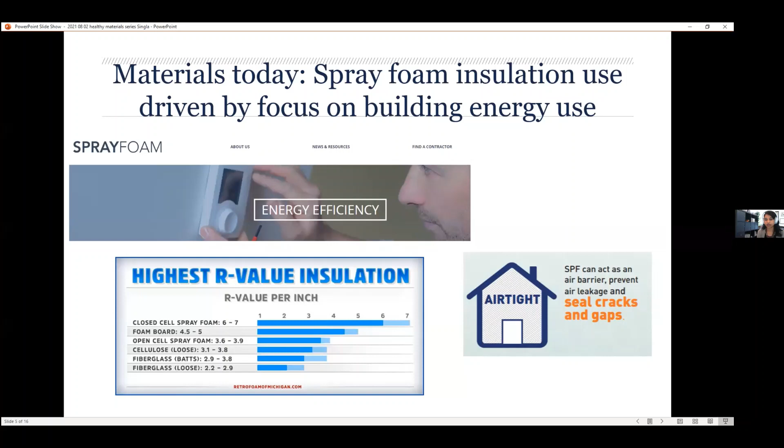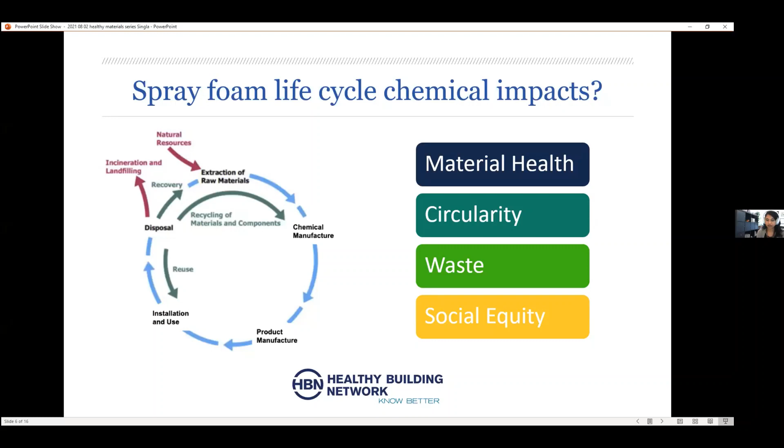So to do that, in collaboration with the Healthy Building Network, I think Brian mentioned you already heard from Bill Walsh earlier in this series, working together with them to really understand the life cycle chemical impacts in the US of a key spray foam ingredient. And thinking about that potential impact at the different life cycle stages shown here, from chemical manufacture through use all the way to disposal, and looking at those impacts through the lens of concepts that you've discussed in the series that are in that materials primer, considering materials more holistically, thinking about material health, circularity, waste, and social equity. So here's a quick preview of what we've found so far.

So the key ingredient in spray polyurethane foam is called MDI, and it's a type of isocyanate chemical that is itself toxic. It's a respiratory sensitizer chemical. And we found that the chemicals used to manufacture MDI come from fossil fuels, and that these manufacturing and process chemicals are also hazardous. They can cause asthma, cancer, or immediate injury on contact. And the picture here shows one of the facilities that manufactures MDI in Baytown, Texas.

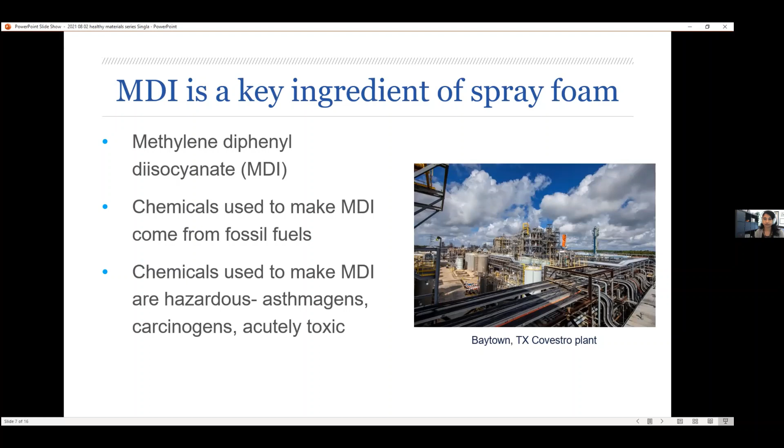So we found that in the US, overall, there's 3 facilities that manufacture MDI. They're all located on the Gulf Coast of Texas and Louisiana, shown in the purple icons on the map there. And together, these facilities release on average 560,000 pounds of hazardous chemicals into the air and water of these communities every year.

The facilities have a history of EPA non-compliance, and multiple accidents have been reported that injured workers or resulted in releases so toxic that surrounding communities were ordered to shelter in place. And these communities are disproportionately people of color. So in Louisiana, the percent Black population in the 3-mile radius around that facility is 2 to 3 times higher than the national average. And around the Texas facilities, the Latinx population, again, is about 2 to 3 times higher than the national average.

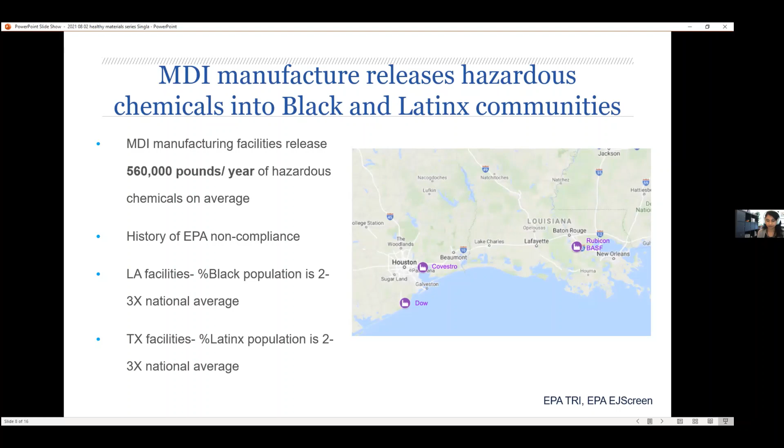And then looking at that end of life cycle stage, what we found is that spray foam is largely landfilled, and in that process can release microplastics and hazardous chemicals. And we didn't identify any reuse, recovery, or recycling pathways for spray foam. And this seems to be partly because it's challenging when the material is foamed in place and adheres to the surrounding building materials.

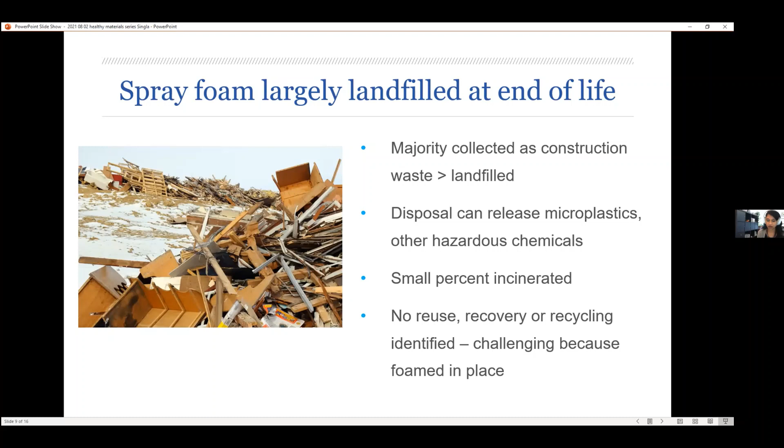So in summary, our case study found that spray foam performed pretty poorly in these important areas. It contains toxic components. There's no pathways identified for recovery, reuse, or recycling.

We're seeing large amounts of hazardous waste generated in the manufacturing process. And this is disproportionately impacting Black and Latinx communities in proximity to these facilities. So this really illustrates the negative, broader impacts that can happen when you're only focused on one aspect of a problem, like building energy use.

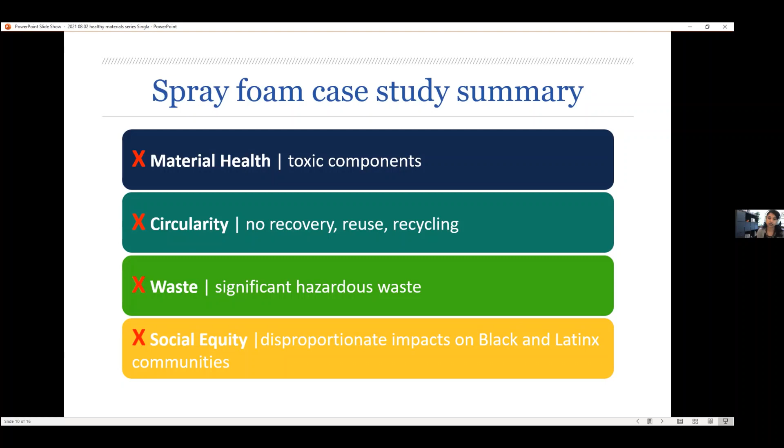So where do we go from here? And as someone who thinks a lot about policy and how policy can really help to support and drive the changes that we want to see, I wanted to share about some exciting new frameworks that are really taking different approaches to these intersecting issues of buildings, climate, chemicals, equity, these issues that kind of sit at the center of that spray foam case study example.

So these have all come out in the last year or two. It's really the latest thinking. And I'll talk briefly about each of them. So we have the health and well-being framework from the World Green Building Council, the chemicals strategy for sustainability from the European Union, and the equitable and just national climate platform.

So the World Green Building Council released last year these principles for a healthy, sustainable built environment. And if you're not familiar with the World Green Building Council, it's an international organization that's part of the UN Global Compact, and its members are all green building councils from around the world. So for example, the US Green Building Council is a member of the World Green Building Council.

And their mission is to advance the UN Sustainable Development Goals and positively advance climate action, health and well-being, use of resources, and a circular economy. So this framework has 6 principles for a healthy and sustainable built environment. And some of the examples from the different sectors they cover: in the protect health category, they're thinking about air and water quality, mental health, and community health. In the take climate action bucket, they're thinking broadly about adaptation, efficiency, and material health.

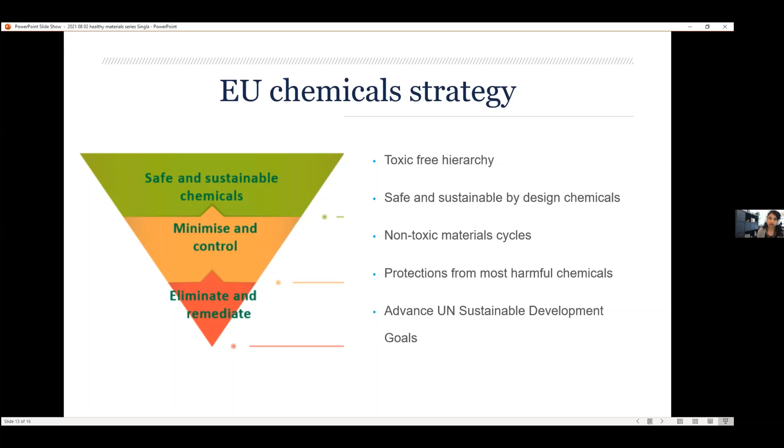And I wanted to point out one really important theme that really runs through and connects a lot of these areas. And that's these buildings, systems, and economies that work for people and all people. So really thinking about local and regional supply chains and inclusive access to high quality, safe, and family sustaining jobs.

So each of these policy frameworks is kind of coming from a different perspective, right? Focused on buildings, focused on chemicals, focused on climate equity, but there's some really important common themes between them, which I think are all major departures from how policies are constructed today. So I'd say first, today's policies tend to be pretty reductionist and address only a narrow aspect of an issue like building energy use. Whereas these policies are much more holistic and explicitly recognize the need to address interconnected systems and transform systems for change.

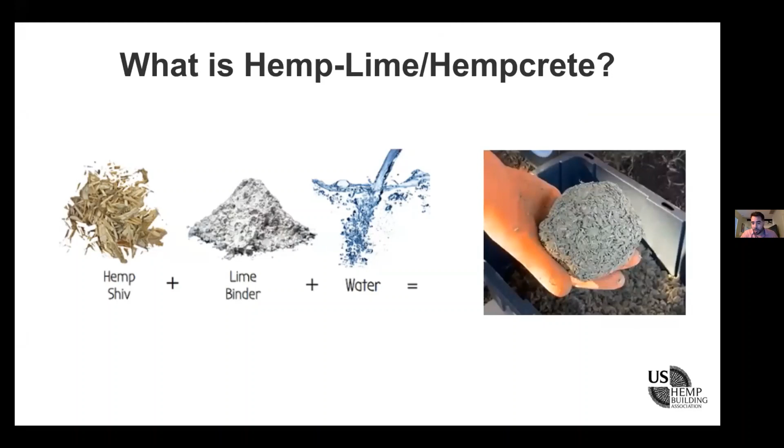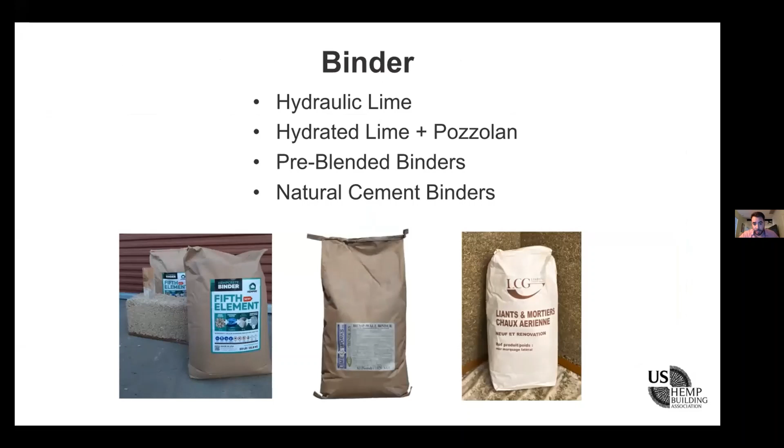concrete-ish insulation replacement. So what's so great about industrial hemp is that it's one of the fastest growing plants out there. And you take the hemp stalk and you remove the fibers, and what you're left with is the woody core, which is what you use for your infill mix. And there's different types of binders that you can use: hydraulic lime, hydrated lime with a pozzolan, pre-blended binders, and natural cements. And some of the benefits of hempcrete or hemp lime is that it's carbon sequestering. It has excellent moisture and thermal capabilities, fire, mold, and rot resistance.

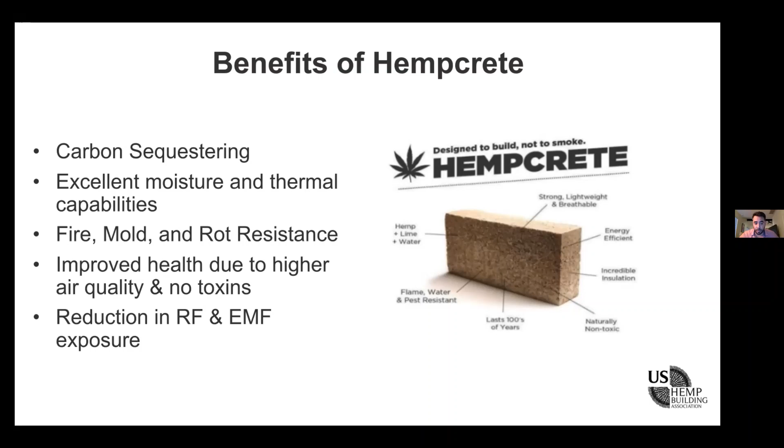There was an ASTM fire spread test done that came back with a 0 score, which was one of the first done here in the United States. It also helps improve health by improving the air quality and is 0 VOCs. And then people are starting to look into more of its RF and EMF reduction capabilities as well.

There's 4 main ways to install hempcrete. One is the cast in place in the upper left-hand corner, kind of like a rammed earth. You use the form boards to build up the insulation wall where you surround your studs. The second to the right of that is hempcrete blocks already pre-manufactured. All you need to do is mortar them together and you're good to go.

The bottom left is pre-panelized wall systems to help expedite the process and control the curing of the hempcrete. And then on the bottom right is the spray-applied hempcrete. So this is much faster, along with the blocks, which helps cut down the installation time and the labor costs, which cast in place in the upper left-hand corner could get a little bit more costly with.

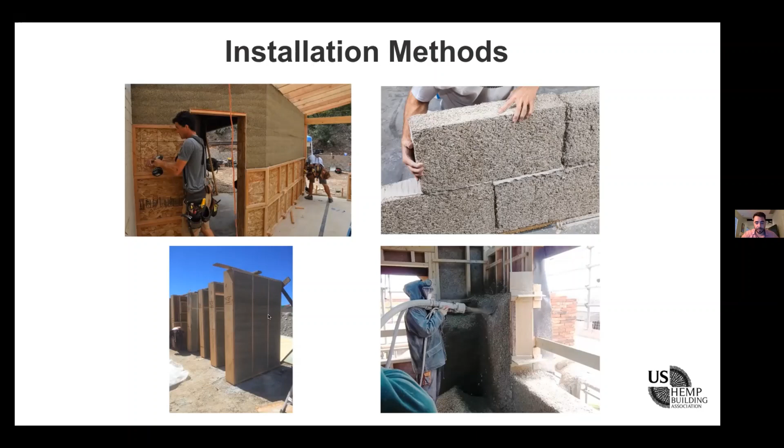So there are other hemp-based building materials. Hemp fiber insulation, hemp wool, is one. It's an easy plug-and-play material instead of hempcrete. A lot of the hempcrete installation takes some training and a little bit more advanced contractor knowledge.

There's hemp wood in the bottom left-hand corner, an amazing material replacing wood floors for more sustainable options for flooring, like bamboo. Hemp Shield, which is a non-toxic wood sealant based on hemp oil. And then Cannagrove is a company that has hemp-based wood fiber alternatives for cabinetry and other types of wood forms.

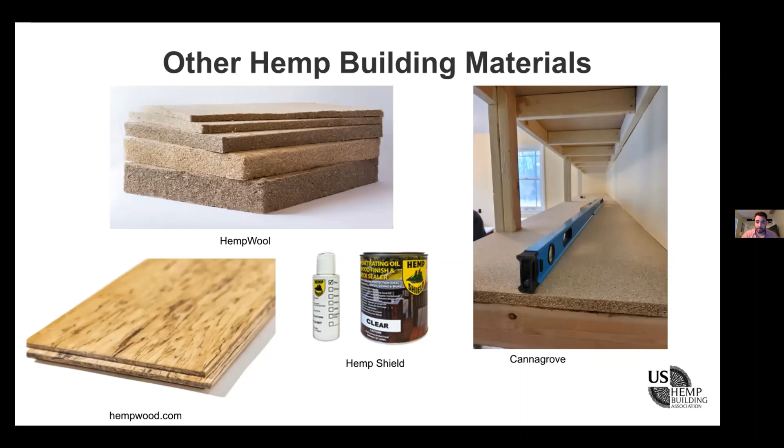Also, hemp-based plastics. There's a company, Hemp Plastic Company, that's doing an incredible job replacing a lot of petroleum-based plastics with natural hemp plastics. So lots of plastics are used in the construction and building industry as well. So if we can start to implement more of these, non-toxic, biodegradable options would be great, especially for the workers on site, and where it inevitably ends up in our soil.

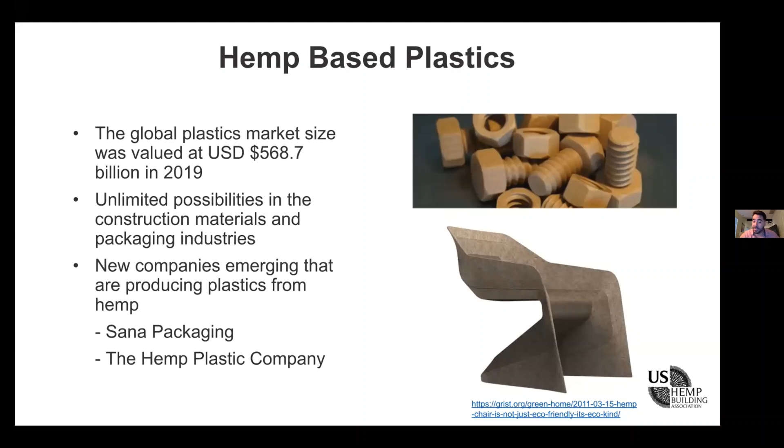So some of the current limitations that we have in the hemp building industry, and especially in the industrial hemp industry, is the availability of local materials. A lot of these materials are sourced from Canada and Europe, and a lot of the issue is we don't have a lot of farmers growing the industrial hemp crop. Mostly it's grown for CBD. And also we don't have a lot of the processing capabilities yet.

So there are companies, IND Hemp out of Montana. There's a facility coming up here in Texas that are really trying to encourage and focus on the industrial side of hemp and getting those processed materials, especially for the construction and building industry, to help support this demand.

When it comes to hempcrete as well, quality control, making sure that the labor is skilled and knowledgeable. There are some different intricacies when you're using hempcrete to take into account. Educating experienced architects, engineers, and contractors, and starting to get hempcrete and hemp-based building materials acknowledged in the local building codes as well.

And if you're looking to use hempcrete, upfront construction costs can be up to 10 to 30% higher than traditional stick frame construction due to the current limitations above. But once we can start to find faster ways to implement the insulation and have more efficient ways of educating our contractors, that cost can be reduced. And also with the localization of processing and industrial hemp growth here in the United States.

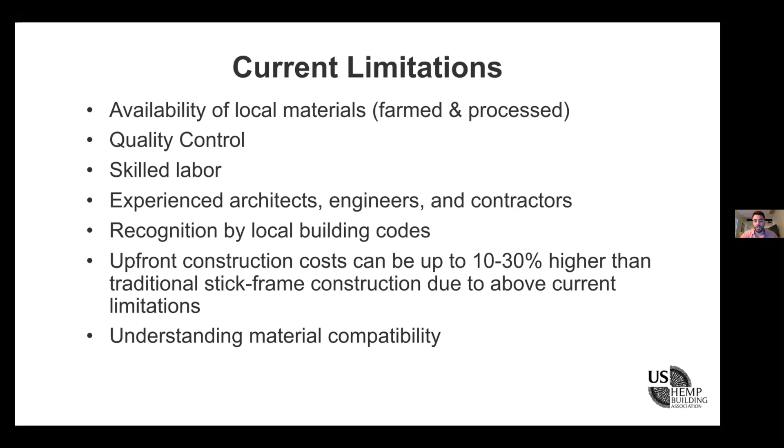And then also understanding other material compatibility when it comes to hempcrete. When you're using hemp fiber insulation like hemp wool, that material compatibility isn't as important. For hempcrete, you want to make sure that you do have vapor permeability.

So I'm sure as many of you know, especially being a part of this group, the most important thing that we're really trying to reduce here is our carbon footprint. A lot of the industries and most people you talk to out there are really just focused on operational energy, whereas we're really looking to focus on the embodied energy of the materials that we're using.

So one of the great things, I apologize. One of the great things that hemp is able to bring is a localized material that is very highly carbon sequestering. Also, when it comes to the lime binders that I was speaking of previously, you can localize that, looking for localized pozzolans and localized hydrated lime to really localize the supply chain and regionalize that.

So it's very important, and the U.S. hemp building industry really is focusing on reducing the embodied carbon as much as we can by trying to support the different regions when it comes to localizing industrial hemp farming and helping get processing facilities in those different regions as well.

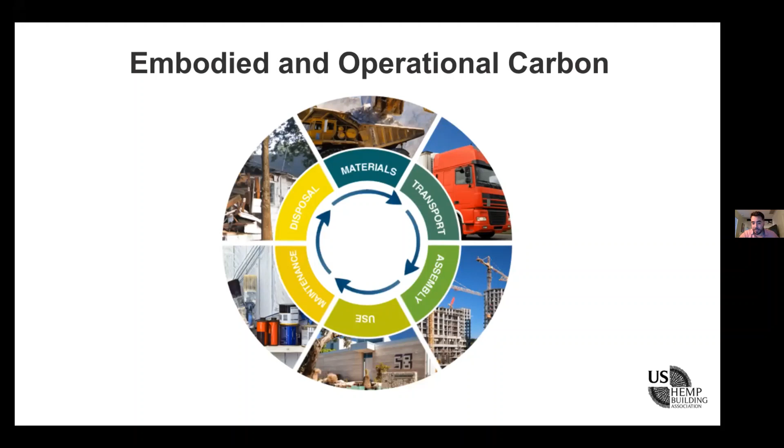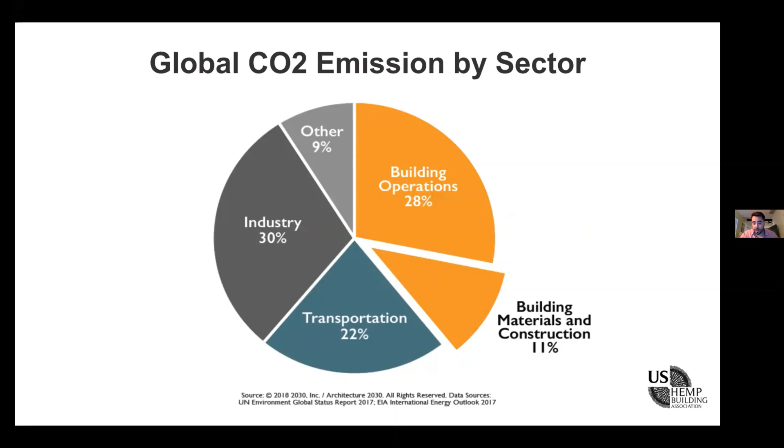So the global CO2 emissions account for almost 40% with the building operations and building materials and construction. So we really feel that the industrial hemp building industry can help reduce that. And in one of my favorite books, The New Carbon Architecture by Bruce King, he actually did a carbon sequestering insulation study with hempcrete and found that the CO2 sequestered from a 4x8 foot wall at an R28 insulation value was the most carbon sequestering, just above straw bale.

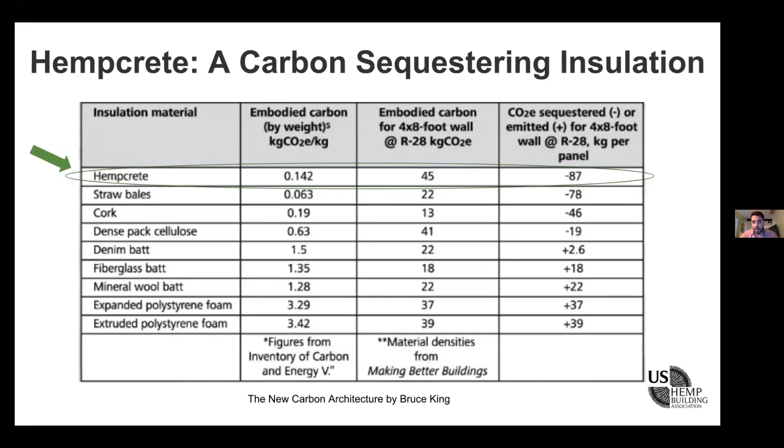So if we can really educate our building industries to start to use these types of materials and alternatives, one, we're making a healthier built environment, but also helping with the solution of reducing our carbon footprint.

And a lot of people ask, especially with hempcrete, what is the carbon sequestering nature and the percentage that comes out of it? So most of the carbon sequestered during the process is through the cultivation of the industrial hemp. The rest, that 10% or so, is the calcification when the hemp is mixed with the natural cement or hydrated lime, and the wall insulation system begins to harden. So that's the percentage breakdown of the CO2 sequestration.

So I'd like to encourage people. Before, I used to always be pulling examples of hempcrete structures in Europe or in Australia. But as I'll show you here in a little bit, there's actually a lot of great projects coming up. Up here in the top left-hand corner is an affordable housing project in the UK called the Triangle Housing Project in Swindon, one of the first affordable housing projects built with hempcrete. To the right is a beautiful condominium project that they did in Italy.

And then they used hempcrete for the construction of a Marks and Spencer department store, where they found almost a 40% reduction in their operational energy use. So getting commercial projects has already happened in Europe. Unfortunately, we haven't gotten there yet in the States. I'm hoping in the near future that'll begin to be the case.

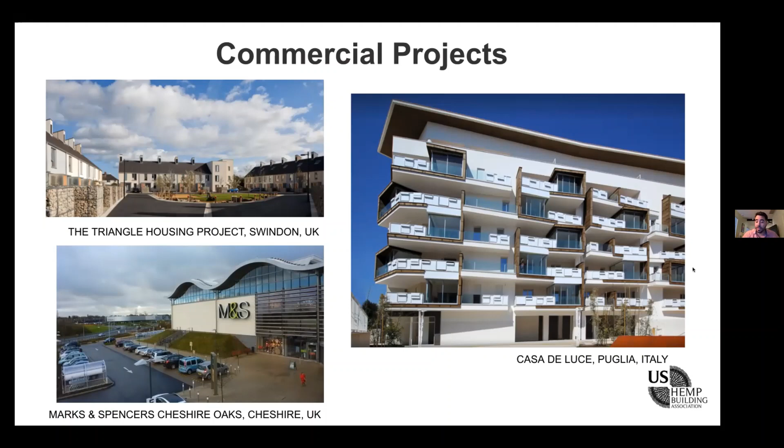But the US is starting to compile quite a few projects, which is great for local building code education, getting builders and contractors more comfortable and excited to use these materials. Up in the top left-hand corner is the Highland Hemp House out in Bellingham, Washington. The hempcrete was installed by Hempitecture, as well as one that they did down here in Leander, Texas, which is right outside of Austin.

This one was more of a custom home build that used a Minka frame from Japan, a very unique project. I wouldn't say it's the nicest carbon footprint on that project, but very unique and beautiful architecture. One of the first hempcrete homes that was built in the US was in Asheville, North Carolina. That was actually built for the mayor, and it really set the tone for the industry.

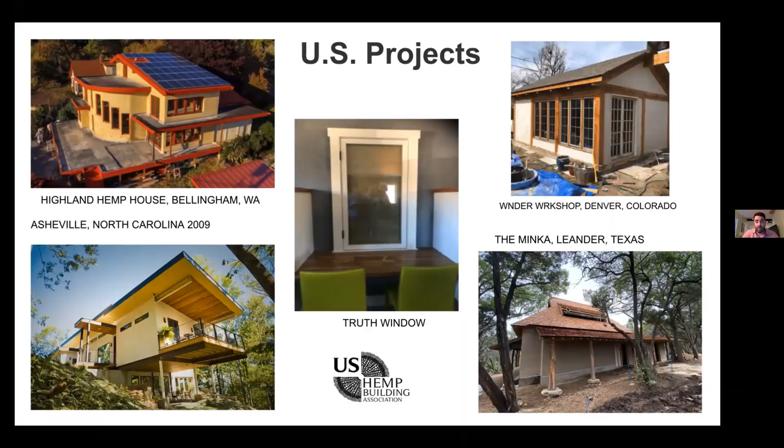The first permitted hempcrete home out in Denver, Colorado, the Wonder Workshop, was built by Left Hand Hemp. And then here in the middle, just to show what's within your walls, because you're usually plastering them, and to show the beautiful insulation, a lot of people do a truth window. But like I mentioned before, understanding and being able to increase the speed and the efficiency of installing hempcrete is important.

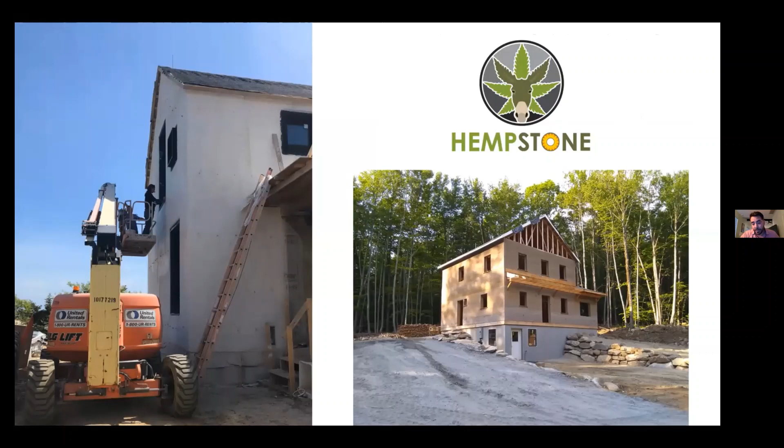So more and more companies and more building code enforcers are beginning to learn about these materials. Coexist, a company out of Pennsylvania, did its kind of do-it-yourself hempcrete lime tiny home efficiency. And I think they did about 30, 40 initial sales that they're about to ship out. So that was a huge success. A lot of great feedback and desirability for that.

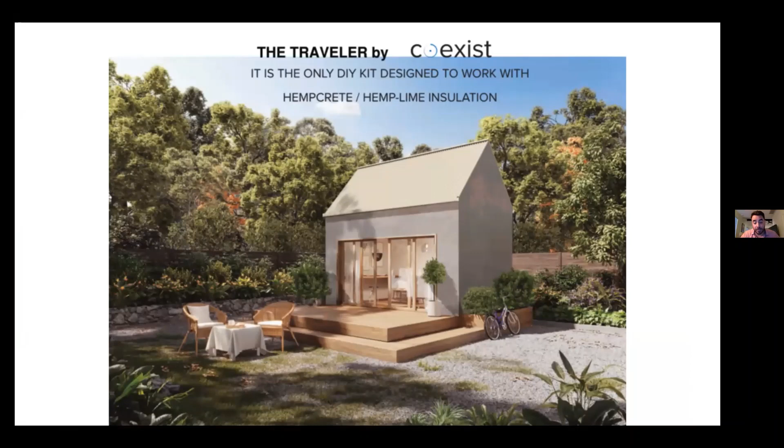Also, when we're getting to the scalability of these hemp-based materials, we really need the infrastructure and the manufacturing to bring it localized. So Hempitecture, like I've mentioned before, just did a WeFunder and raised over $3 million to build an industrial hemp fiber insulation plant in Idaho. So instead of having to ship from Canada and other sources, we're able to localize that, and they'll be sourcing industrial hemp from Montana. So this is a pure example of really beginning to regionalize and localize our supply chain to reduce our carbon footprint.

Like I mentioned to you before, HempWood, which is based out of Kentucky, back in 2019 they raised about $6 million to bring a localized industrial hemp wood flooring company. So it's starting to grow as the industrial side of the hemp industry gets more desirable, and the demand is growing out there as well.

And so also it's important to really have the research behind these types of hemp-based building materials. And many universities have, like Murray State, UC Riverside, University of Kentucky. Kentucky really led the way in the initial onset of the industrial hemp industry, especially back when the Farm Bill was released in 2014 and the new one came out in 2018. The Healthy Materials Lab at Parsons has done amazing work, and they have an incredible research project for more information. And then also here in Austin, Texas, UT's own materials lab at the School of Architecture has done some studies on industrial hemp-based building materials as well.

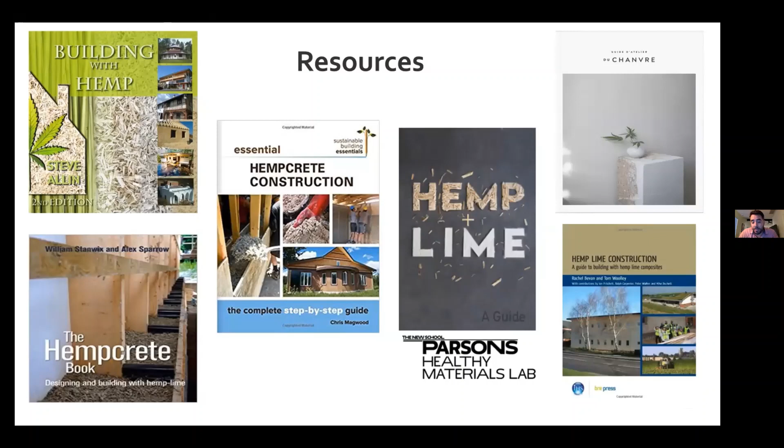And then if you're looking for any other resources to know more about the intricacies, how to build with hempcrete and industrial hemp-based building materials, here are some great resources for you to go research as well, like the one I mentioned, the Hemp Lime by the Parsons Healthy Materials Lab.

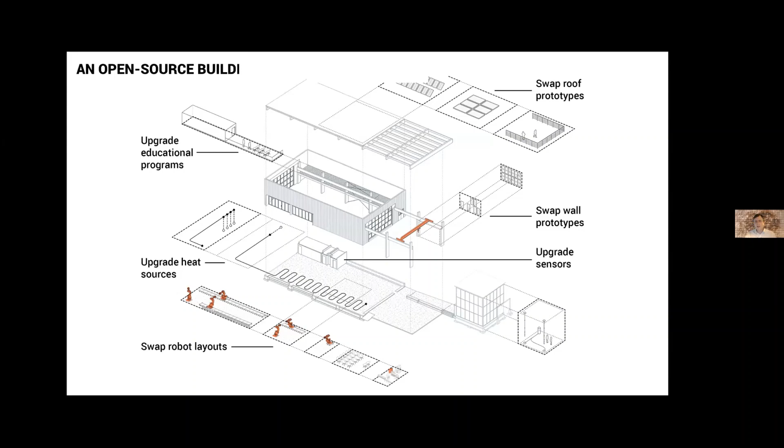Recently, we've been working on some examples of healthy materials in some more traditionally commissioned buildings, such as the Embodied Computation Lab that we designed for Princeton University, shown here. This is a project that we designed as an open source building, specifically designed to be changed over time by multiple authors. And it involved the use of a repurposed material.

But for the sake of our discussion on tomorrow's materials, I thought I would show two experiments in materials that may be healthy in new ways and kind of different ways. And the first is our work with mycelium materials.

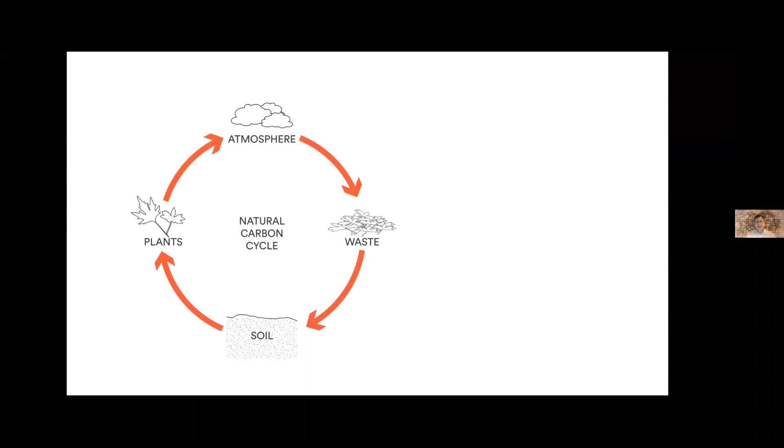So this is a project that began with our thinking about the Earth's normal natural carbon cycle, this endless loop of growth and decay and regrowth, and with thinking that's now sometimes called circular economy. Some of it, I'm sure, we've talked about already today, and it's been covered in past events in the series.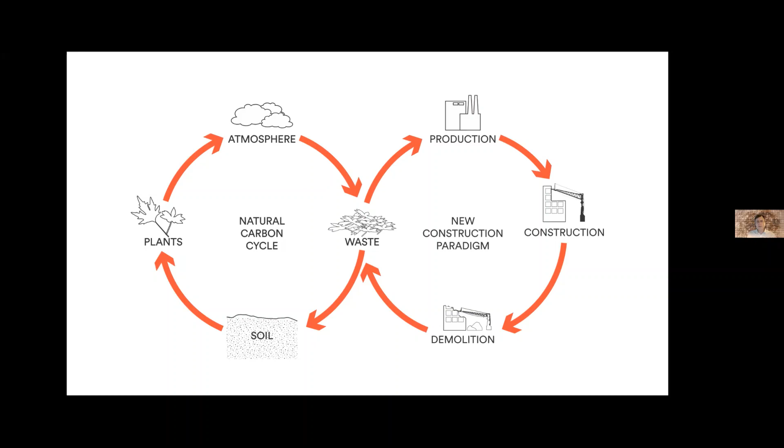But our thinking here was maybe we could take waste as a raw material instead of high value raw materials, spend a very small amount of energy converting the raw materials into building blocks, make a useful structure, and at the end of the useful life of that structure, take all of that stuff, all that physical matter of the building, and return it back to the carbon cycle instead of having it sit in a landfill for hundreds or thousands of years.

And our way of doing this was to think about using a living organism called mycelium. Mycelium is the branching root-like structure of mushrooms. You can see it here under the microscope video.

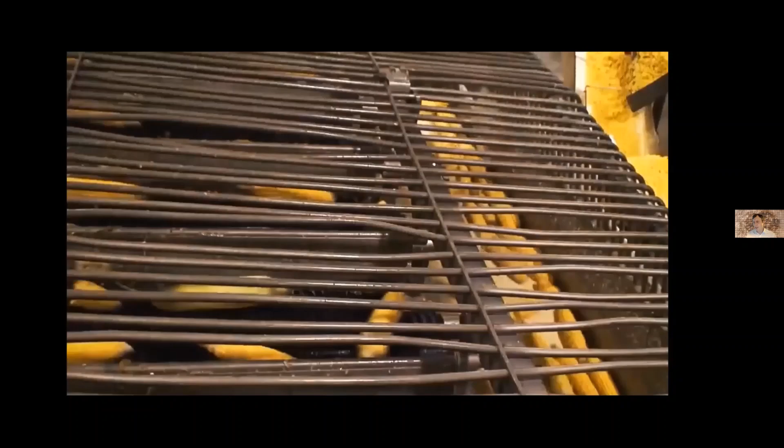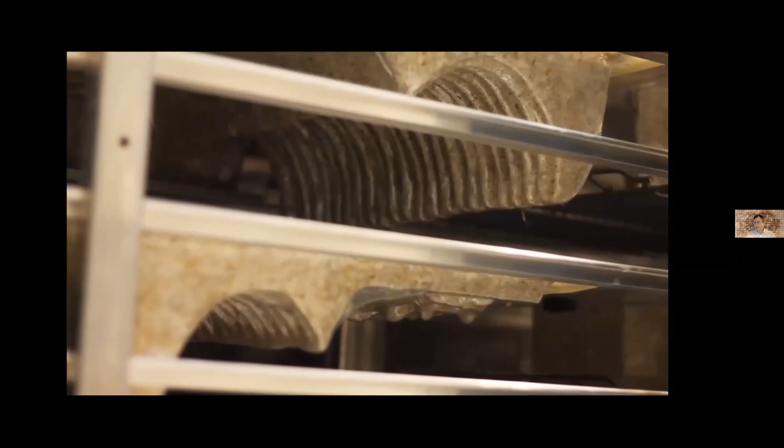And one of the really interesting things about mycelium is you can combine it with agricultural waste, such as hemp, for example. We just heard great things about hemp, or say corn stover, not the high value part of growing agriculture like corn kernels, but corn stover, chopped up corn stalks. Put those two things together, mycelium and agricultural waste, and in about 5 days, it grows into a solid object.

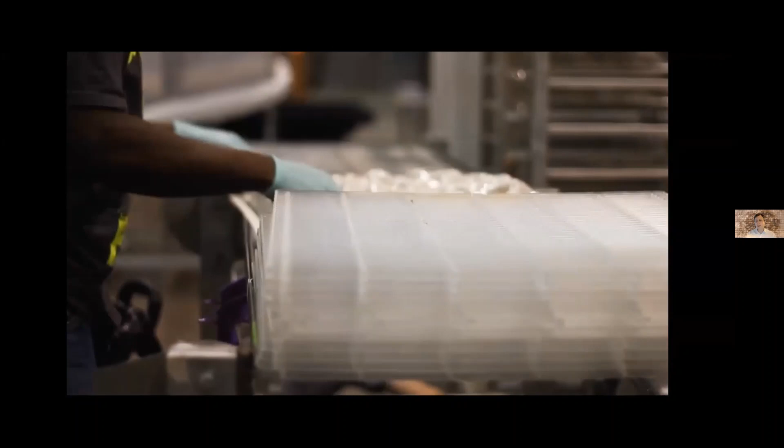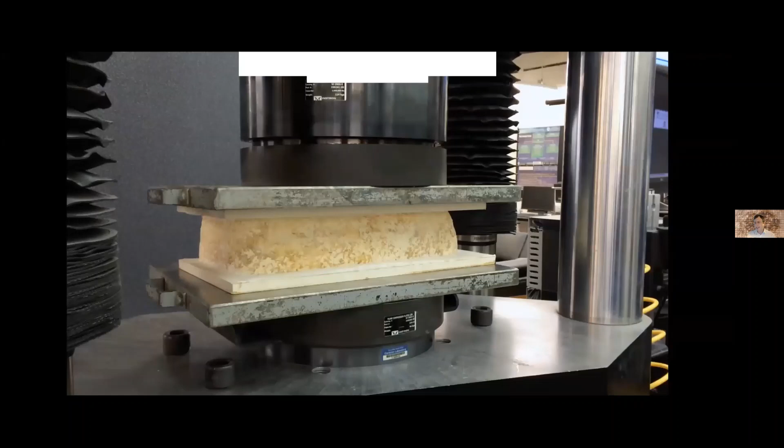This is a really interesting, healthy material that's being used in a number of different applications for packaging and industrial design. And our idea was to use it to experiment with a new kind of load-bearing architectural brick. So here was the brick that we came up with. We did a huge amount of testing, single bricks under compression and small assemblies of bricks. And we had to do this testing because we wanted to create a relatively large-scale outdoor structure.

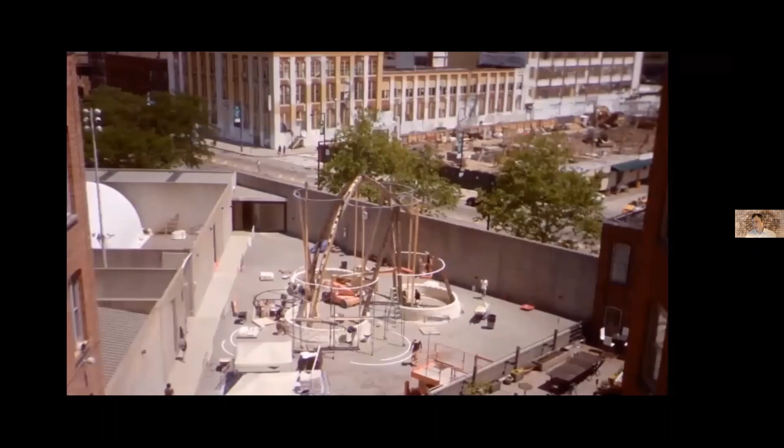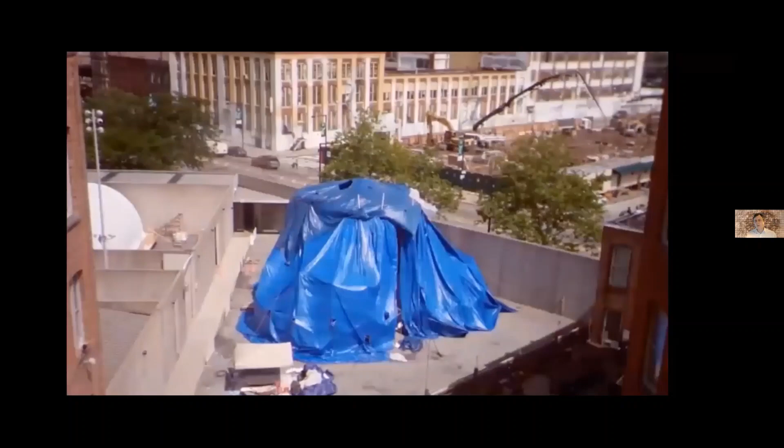Here you see the structure that we constructed in about 3 weeks in the courtyard of the Museum of Modern Art's MoMA PS1. So this is part of the Young Architects program, where for 15 years an experimental structure was built every summer. And here we kind of combined into our mix not only thinking about healthy materials, but also thinking about labor and creativity and construction.

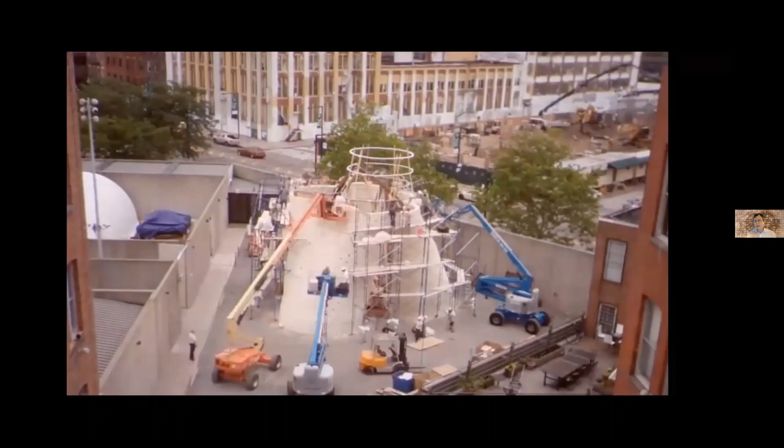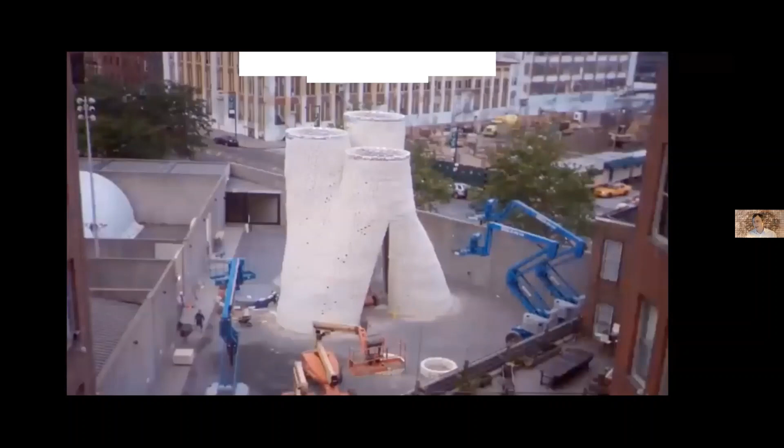We had Columbia University architecture students who knew a lot about form and architecture, combined with New York City brick masons who knew a lot about stacking objects to creatively solve problems on site. So here was our finished structure, shown in the context of the glass and steel buildings of Manhattan in the background, and the traditional clay brick building of MoMA PS1 a little bit closer.

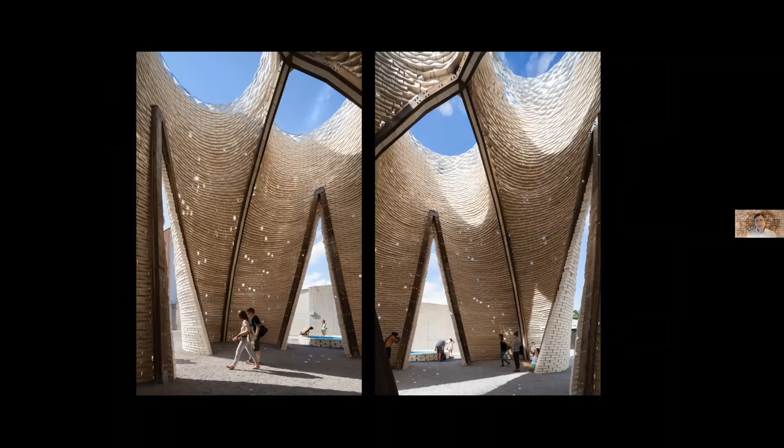And we built this structure. It actually has some hempcrete blocks at the bottom, but most of these bricks, 10,000 bricks, were mycelium bricks. So this was a kind of medium scale test, about 10,000 bricks, so more than just a few objects, to see if we could do this reliably, and about 40 feet tall to see if we could make something more than one story out of it.

And we were interested in the capacity of a structure like this to be interesting architecture. So could it make interesting light and shadow and texture? What would be the foreground and background effects? How could it frame the natural environment?

But the ultimate test of any project at MoMA PS1 in the summer is its ability to host a good party. So here was the first Saturday of the summer. This is back in 2014, when 5,000 people came to the courtyard to hear music, and they were going inside our structure, scratching it, climbing it, and finally, when darkness fell, we breathed a sigh of relief because we knew it was going to work and be safe.

So it made us kind of nervous. It was thrilling, but also terrifying to have people walking inside this experimental structure. But it was also entirely fitting for us to test this new idea about materials out in culture, in society, in public, in a way, rather than just on a lab bench or in the kind of fenced off corner

of a construction site. And there was this kind of engagement with the public through things like social media, these kind of short form reactions of people who didn't know much about the architectural story, but were just kind of coming to a museum and encountering it.

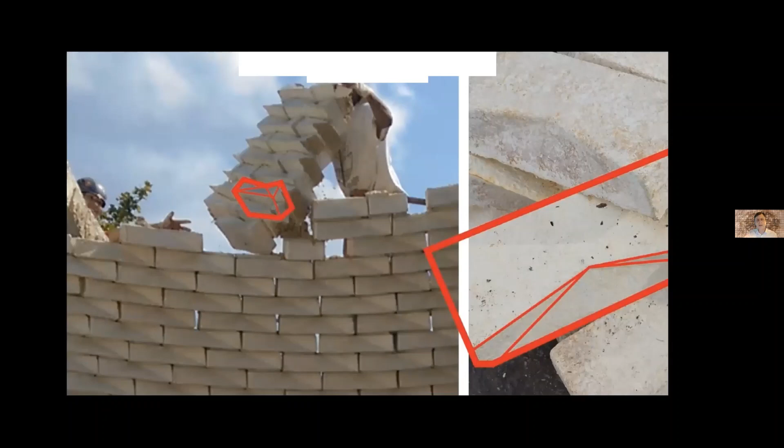And then at the end of the summer, and probably most essentially, what we did was take apart the structure, crumble up the bricks into smaller pieces, combine them with some other living organisms, in this case, bacteria and worms, in a composting site.

And in just about 60 days, all of that physical stuff of the building, all of the matter, returned to high quality soil. And we were able to use that to give to New York City tree planting, but also to give to New York City community gardens, essentially proving that this is a material that was healthy enough to eat, in its next incarnation.

One of the bigger ideas that we took away from this project, in addition to thinking about a single example of a healthy material, was something to think about more generally, that maybe as architects and designers and engineers, we could think about designing to disappear as much as we normally think about designing to appear.

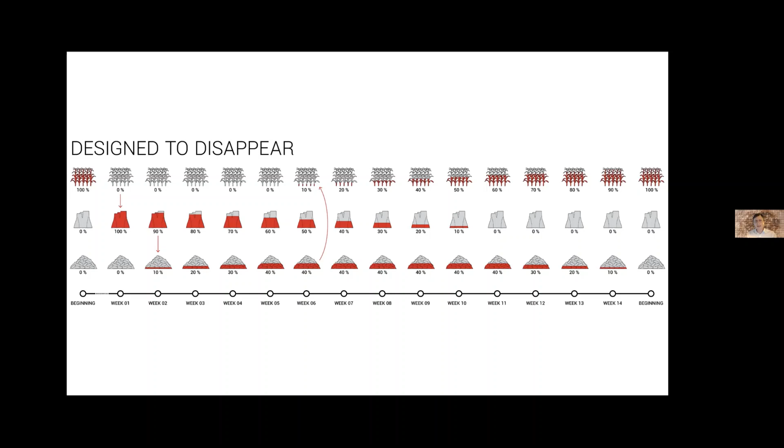In a way, I wanted to describe how this project is an open-ended type of research project. It wasn't designed to be conclusive or finished. It was designed to generate new questions and new possibilities. And in this case, we had a number of ideas about mycelium materials that we weren't able to explore for the museum installation at MoMA PS1, and we found an opportunity to explore some of them a couple of years later. So I'll just describe that really briefly.

One of the things we are most interested in is using this kind of living material, a material that could be potentially alive in its built form. So for PS1, we used a material that was alive during its formation, but then the bricks were dried out. They became dead, inert, and predictable, like all typical building materials.

But we were interested in the possibility that if we didn't dry out the material, if it didn't become dead and inert, what might we be able to do? Might this material have some of the properties of living organisms, like self-healing and self-attaching and growing? And this is an idea that we explored in a project for the Pompidou Center relatively recently.

So we started out by experimenting with growing new units of material and placing them next to each other when they were still growing and alive. And we quickly saw that we were able to achieve what we're now calling biowelding. So the units actually fuse together, and by having a living material, you can have basically brick and mortar in

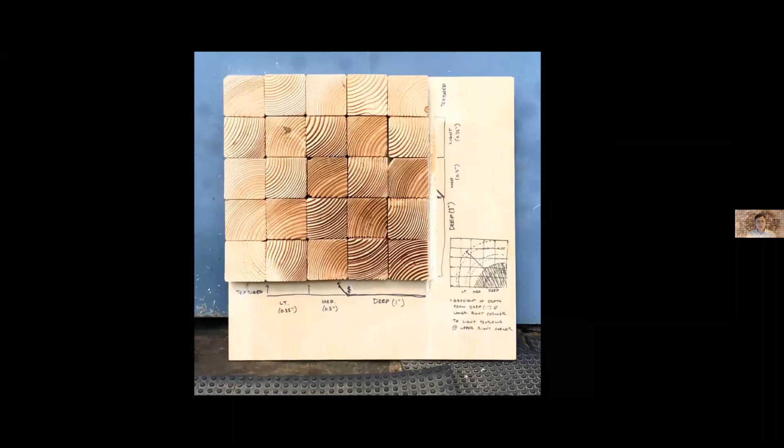And this allows us to see that even the most common and humble building material, a cheap 4-inch by 4-inch post of Douglas fir, potentially has a material story to be uncovered that may offer a range of visible and invisible effects. Again, we did a lot of testing, a lot of our kind of design build, fabricating this stuff ourselves. And so here you get a sense of what it was like on the facade of this gallery.

So in terms of the physical presence of materials, with this building envelope of a bioreceptive wood, we could think of architecture as becoming a sensor for the urban microbiome. And then for the second part of the project, in terms of materials that are actually living, we set up a lab inside the gallery in order to sequence DNA of the microbes on site. So bear with me here, it gets a little technical, but here are some of the basic steps.

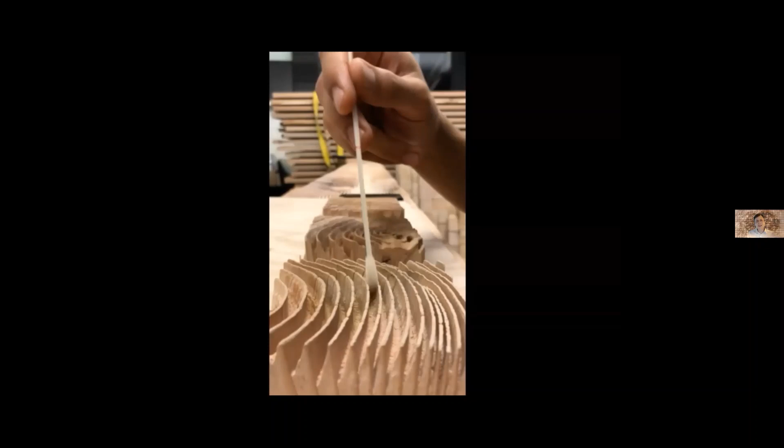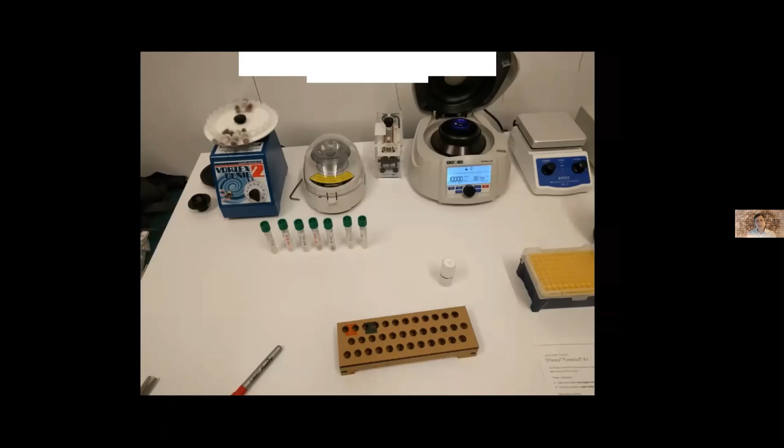First, we swabbed the sandblasted wood tiles from each location to collect any surface microbes. Then we placed this swab in a liquid solution to break down the cell walls. We separated the DNA from other substances and added marker beads at the end of the DNA to produce a pure DNA solution. So all of this was so that we could load the DNA solution from swabbing the architecture, basically the healthy material, into this thing called a flow cell to be processed by a portable DNA sequencer. And here you see it at work.

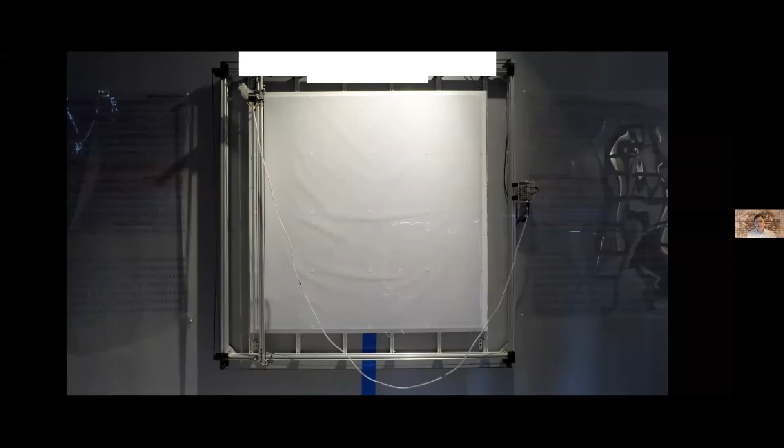The sequencer converts this electrical charge into the sequence data, which is basically the genetic code, the A, T, C, and G that we know of as creating DNA and code. And so finally, after we sequence the DNA from each location, we designed the system to automatically draw the output as an early and rough map to an uncharted territory. So the map is a kind of coarse resolution, but it's already allowed us to see some interesting things.

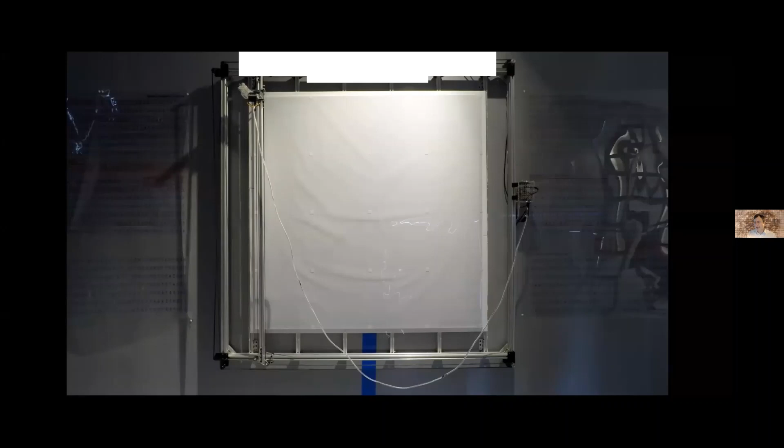For example, in the Brooklyn Navy Yard, we're seeing microbial DNA that performs the function of breaking down heavy metals, which indicates that the Navy Yard has specific pollutants not found in Soho. So based on sequencing the DNA from architectural materials in one place and architectural materials in another place, you can find out some of the things that are going on in those environments. The architectural material becomes a kind of a sensor.

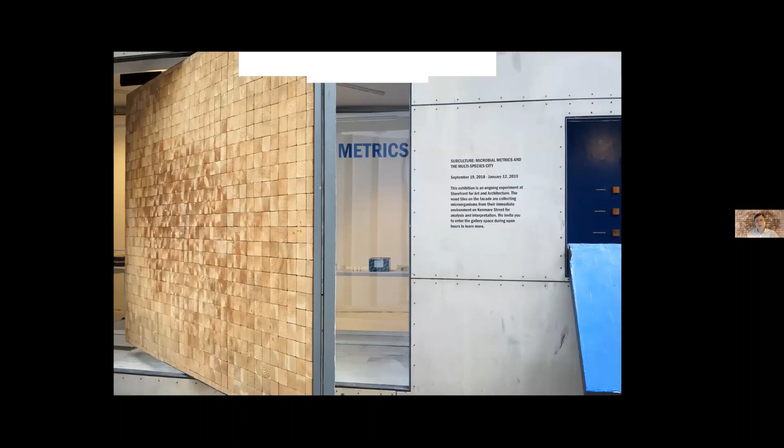So overall, we're using this kind of installation as an active living experiment. We're exploring a new kind of material or an architectural envelope and seeing some of the important matter and organisms that help keep us alive. We're looking at materials and their layers of living things, reframing buildings as stewards, not only for humans, but for the urban microbiome. And the initial evidence indicates that our collective future, the future of all humans plus all non-human animals and all microbes, is probably a lot more collective than any of us can see or imagine.

And finally, just to show how this kind of project is an ongoing experiment that keeps going. We have been thinking about how, not only something like sandblasted wood, but probably all materials, all organic materials, but even non-organic materials are literally alive, and they always have been. And this is because they're teeming with these invisible layers of microbes. So in a project that is currently on display at the Venice Biennale, we wanted to experiment with what this could mean for some of the buildings and cities of the future.

Here we're exploring a different bioreceptive material, and thinking of it as a kind of prototype for a multi-species building. So I'd like to conclude by offering a kind of story or a vision about, in a way, tomorrow's materials and the future of living buildings that we hope would be relevant and capture the imagination of both architects and designers, but also the general public. So I'll just kind of read this story, and that will be the end of the presentation.

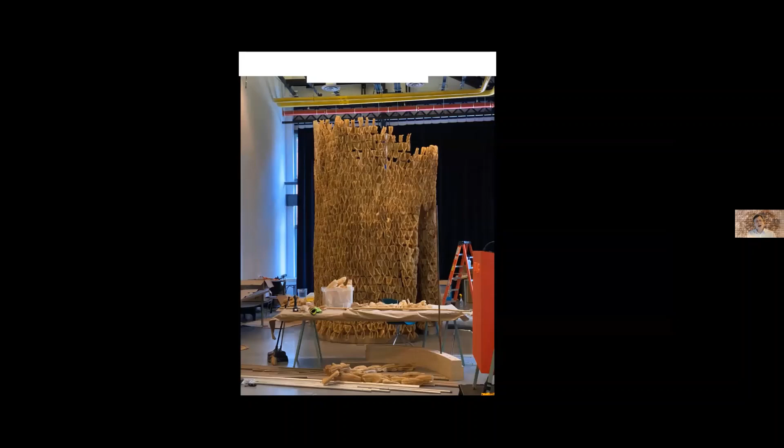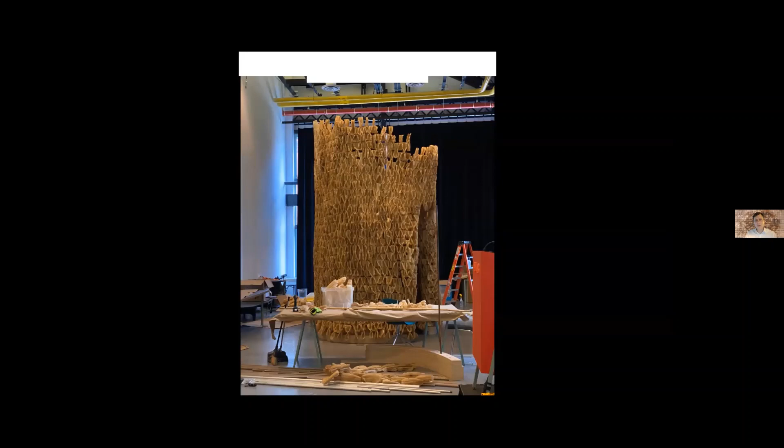So microbes are everywhere, invisible to the human eye. They live in the air, within the walls, and on even the cleanest of surfaces. We have always lived together with microbes, and the vast majority of microbes contribute to our survival and our well-being. The human body has more microbial cells than human cells, and although a few types of bacteria and viruses can make us sick, many other types actually defend us and limit the effect of the harmful ones. Bacteria in the human gut help us digest food. Viral DNA in humans helps us process and store memories.

From this perspective, each of us is a metropolis teeming with life. And like the residents of the city that contribute to its culture and make it run, the microbes of the human body contribute to its vitality and give it energy and personality. Microbes help make us who we are. As I read this description, you will shed 2.5 million bacteria, breathing them out and shedding them from your skin and hair. Most of them will die. And the ones that survive in our typical architectural environments tend to be the ones that have antibiotic resistance and enhanced virulence, the ones that are most harmful to humans.

Yet in environments with high diversity of microbial life, the harmful organisms tend to be outweighed and mitigated by the benign ones. So what if we could change our architectural environments to be better hosts for a diversity of microbes and to decrease the amount of harmful ones? Rooms could have different microclimates and many types of microbes. Equipment for ventilation, heating, and cooling could be supplemented by microbial reservoirs. Materials could be sponges, textured, porous, and organic with infinite surface area. A bioreceptive material like loofah could be designed to catch and host microbes with tiny cavities of different sizes and shapes that create different pockets of shade, temperature, moisture, airflow, and nutrients.